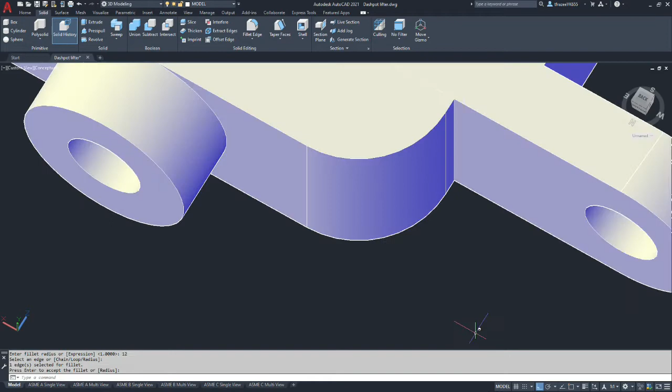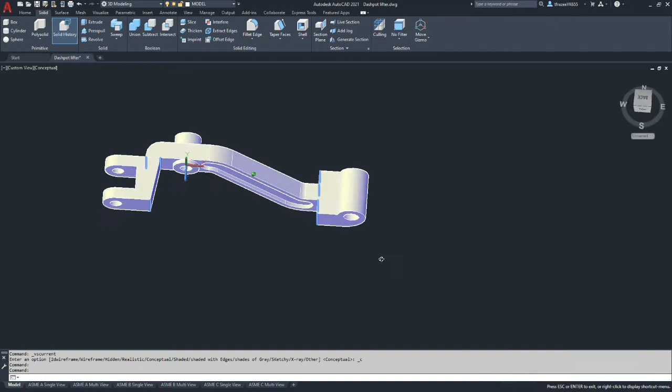Okay, so we got those pockets done. Only thing we have left is fillets and cutting the clevis slot in this side of the part, which I initially forgot to do. So here, let's do it. Okay, we need to be in the top view, and we're actually going to draw on the bottom of the part.

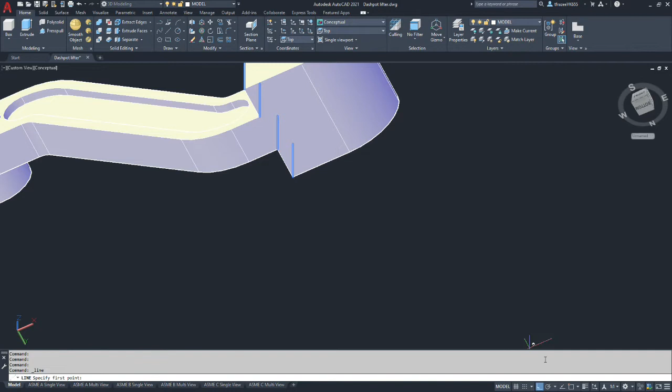So our slot, if we start on the front and draw a line with ortho on out to the extents there, so it's off the part, we can then offset that line 9 millimeters. And then we offset again another 20. And that gives us our width of our cut. And then it's 12 millimeters from this edge back here.

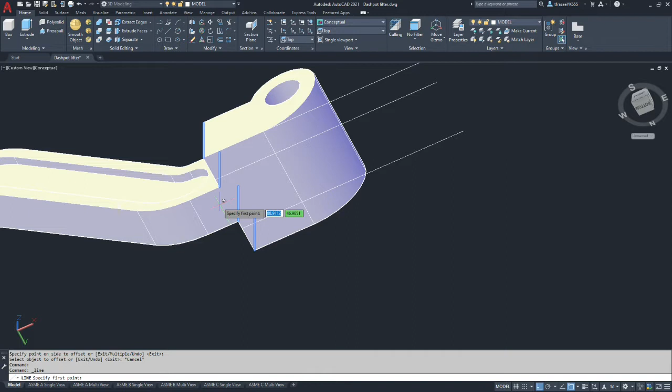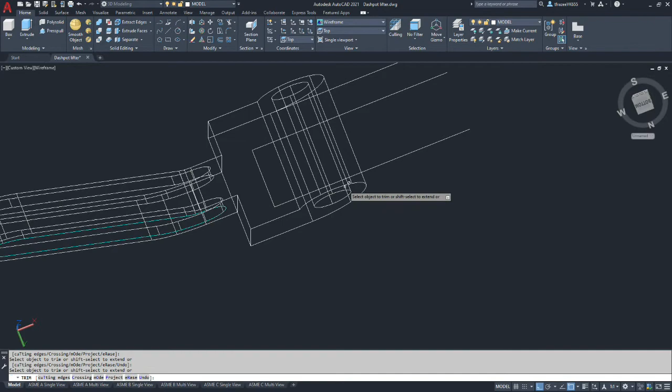So we'll go from end of line to end of line. Let's go to wireframe. Okay, I'm going to offset 12 millimeters from here to the inward, and we're going to trim off these ends. Alright, now the other side of our cut is somewhat arbitrary, it doesn't really matter. We can just connect the ends out here as long as it's longer than the part.

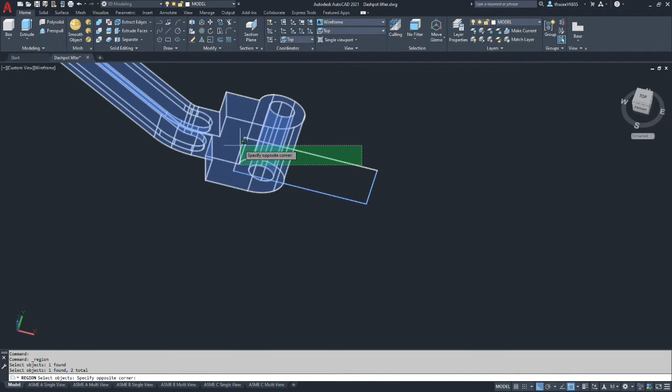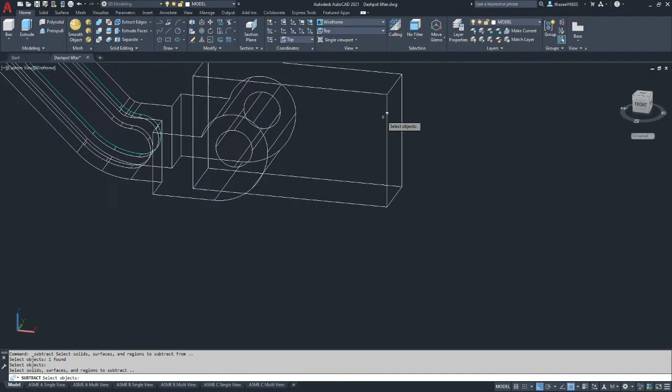Okay. We're going to make a region out of that box we just made. And then we're going to do an extrude with that region. And once we select it, we're going to come up. And let's go 40. And then we're going to do a subtract. So we're going to select the model, hit enter. We're going to select the shape that we're going to subtract, and there we go. So we have our other clevis slot.

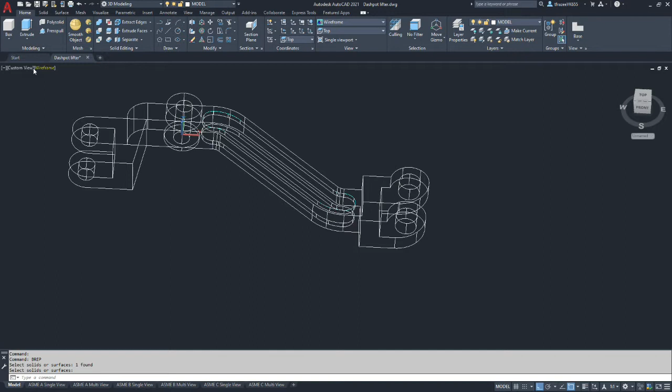Alright, so I already did one fillet. Now we're going to go through and do a bunch of other fillets. And we're going to use this command called brep. And we're going to select on the model. And that should turn the solid model history off. Okay, so now let's go to a conceptual view, and we're going to start putting in fillets. Now I may have to switch out of conceptual, but the radius on all of our fillets are R2s.

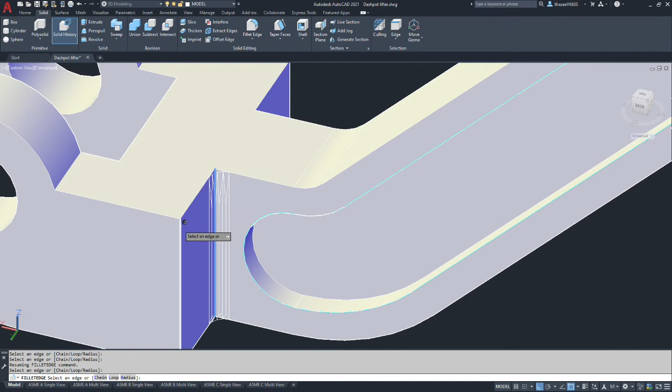I'm going to start with all the ones that you see vertically. So we've got one here, one here. So anything that would be vertical in this angle. There. Here. Here. Those look bigger than R2s to me. Okay, so we got all those so that we can do continuous loops on our other edges. Let's type radius, yeah, that's R2. Okay, so all of those pretty straightforward. They occur where they're supposed to.

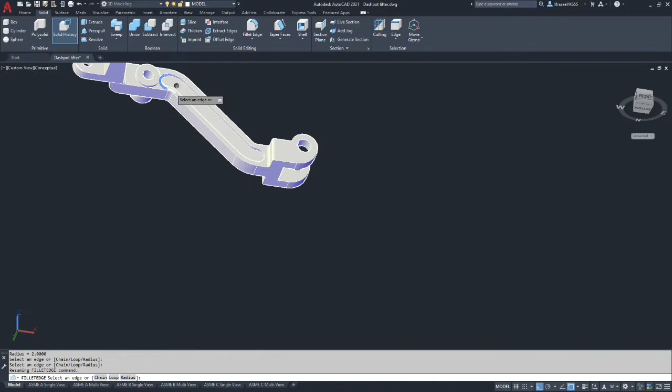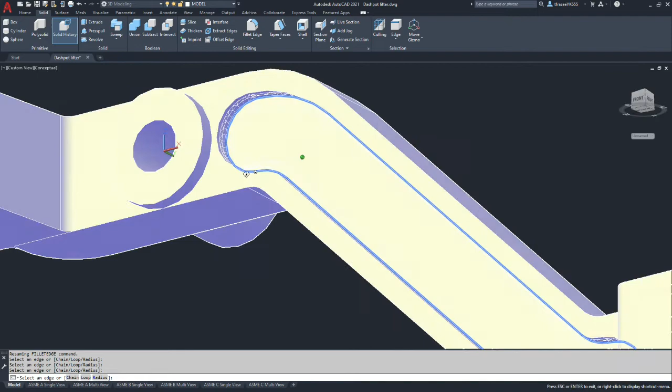Let's start with our pocket. And then we have the top rim of that pocket.

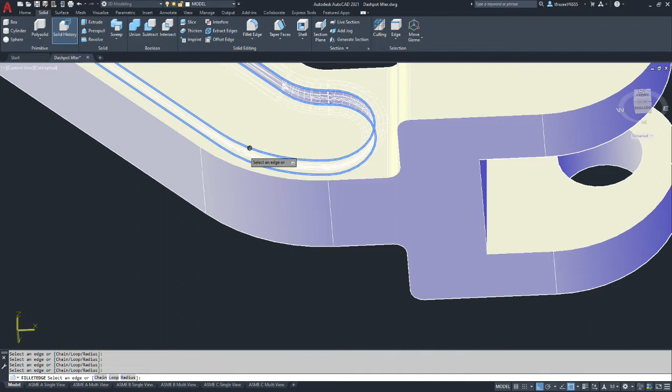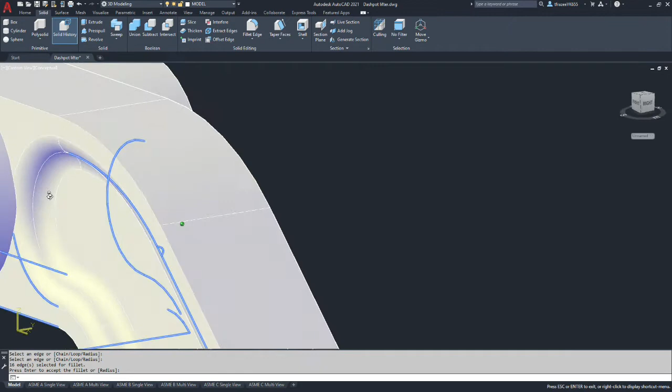Let's hit enter on that. Okay, so that has an S-curve to it and it appears to function properly. Not sure about the transition there with the boss. Let's go do the opposite side. Now start with the floor, just like I did on the other one.

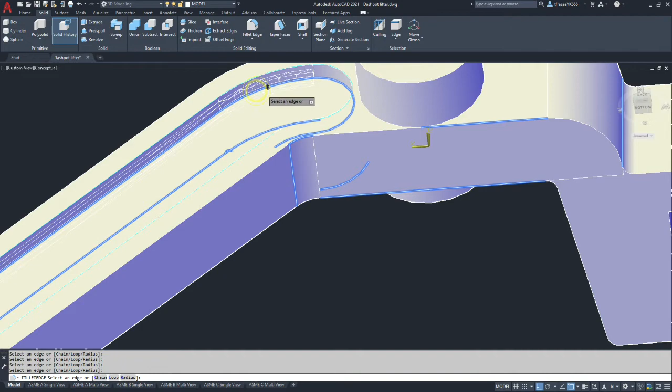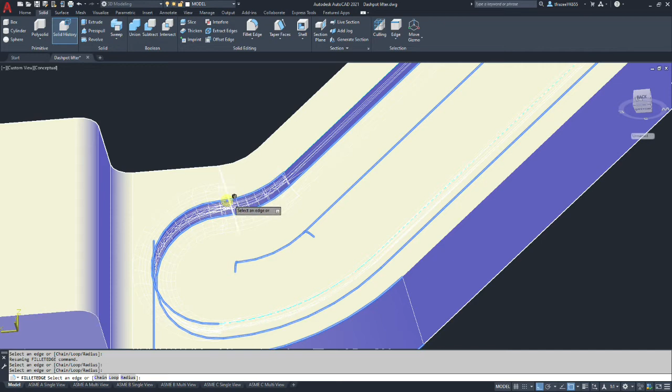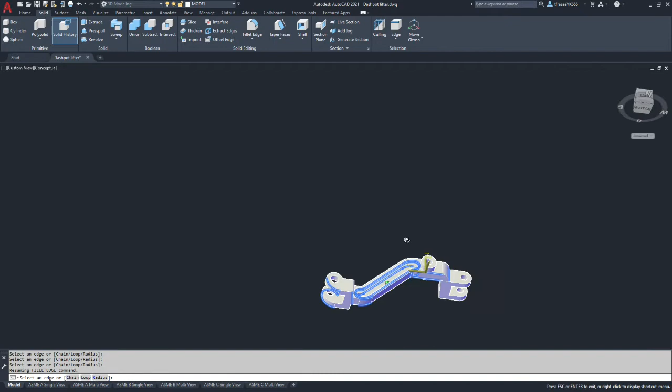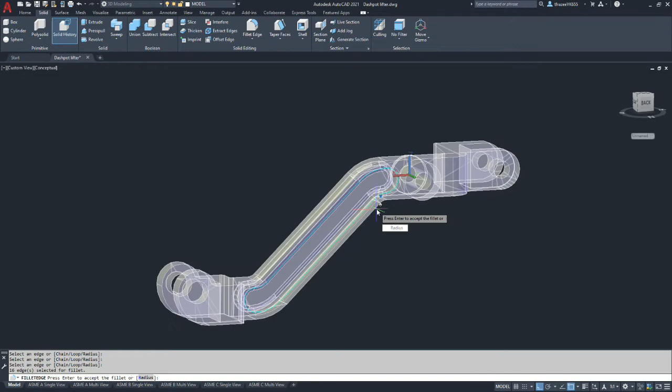And now let's go around the outside rim. There we go. Alright, so the pockets are filleted.

Now we're going to try going around all one edge and see if we can get that to fillet. Now there's a dilemma, we could do the boss first or do around the outside edge first. The fillets around the boss to me are not that important for describing the part. So I'm going to opt to do those second. I might rewind the video and do it differently next time. So we're going to start with going around the rim.

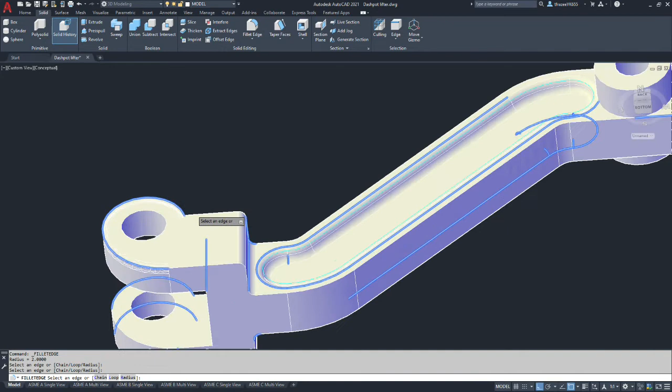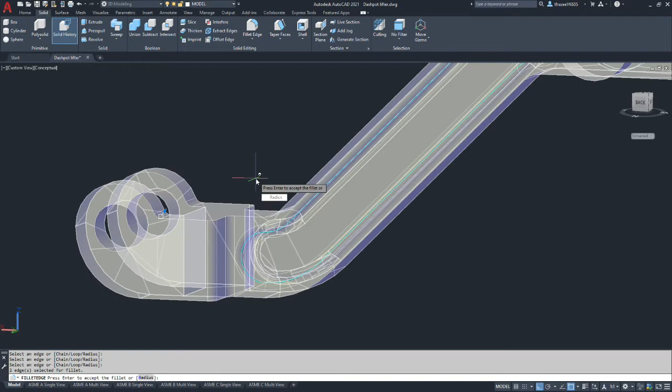Oh, looks like I missed one here. Let's put that in first. Hang on. I should have included that fillet in the first set. Alright, now let's fillet around the edges. And we just keep tracing until we come back to where we started.

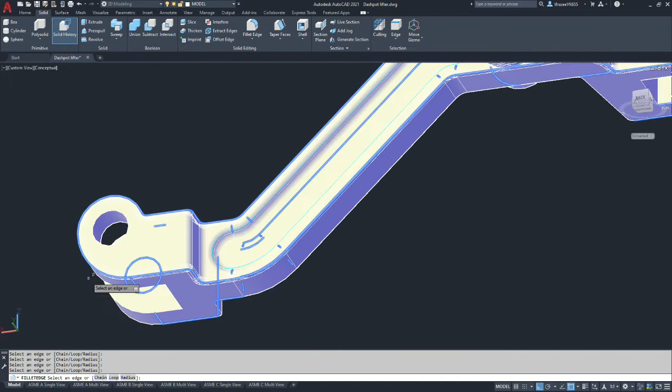Alright, so that's one continuous chain. And it worked. Sorry about the graphics problem. A little blue line shouldn't be there that I've got showing up.

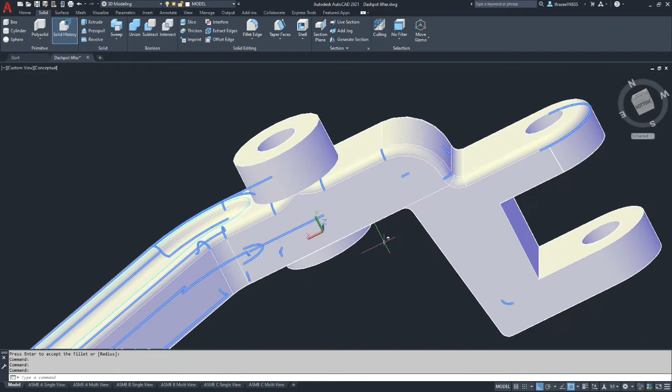Alright, so let's flip to the other side and see if we can duplicate that level of success. So we're back to the front of the part. Fillet. I'll pick that edge. Go around the top.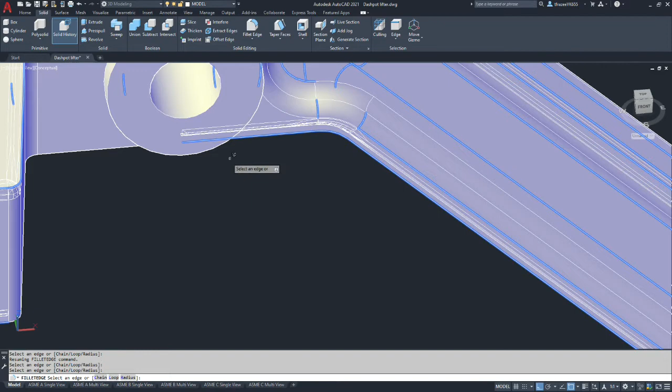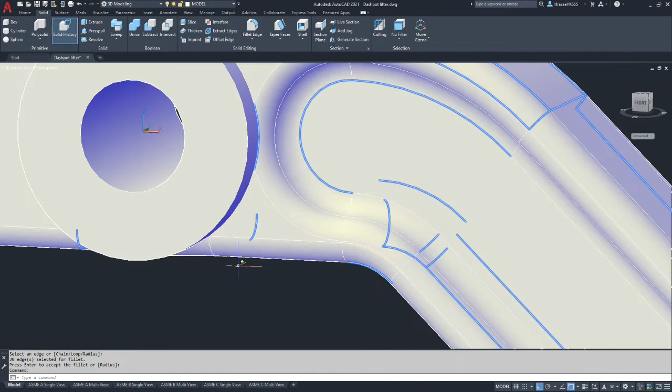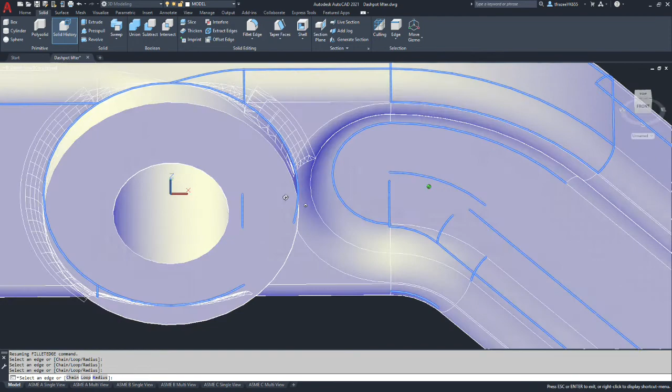Alright, so we have all the fillets except for around the two bosses. So let's see if I can get those to succeed. And maybe they should have been included. I don't know. We shall see. Okay, it looks like those formed. And our last side.

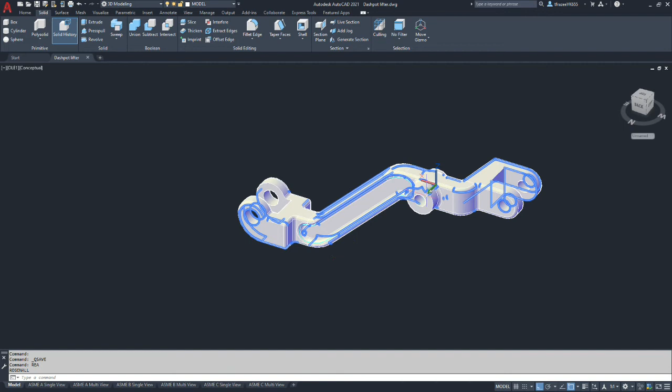All right. Okay, I'm going to exit real quick so you can see it without all these blue lines on it, but I'll be back in just a sec. Okay, there we go. So we have the model pretty much done. We're going to be doing the different views set up for the drawing.

Okay, so what this project ends up going to be is a broken out and a broken out revolve view. Create a top and a front flat shot. And we're going to modify those flat shots, and then we're going to go create the different views we need on C-size sheet. And you need to have this fully dimensioned.

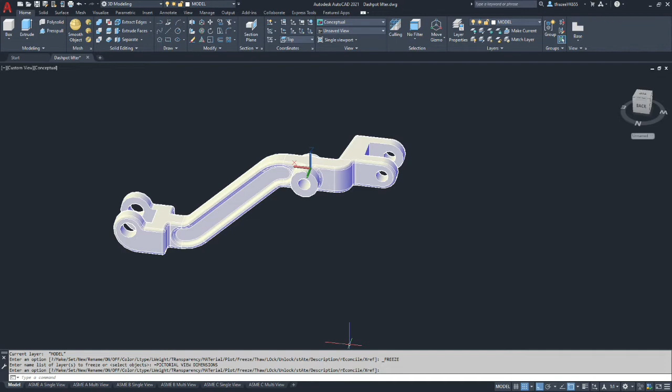Okay, so first thing I'm going to do is I'm going to go home and I'm going to make my construction layer frozen and our pictorial view frozen. Okay, so any of the little lines and stuff should be gone from this view. Okay, so I'm actually looking at the back of the part here.

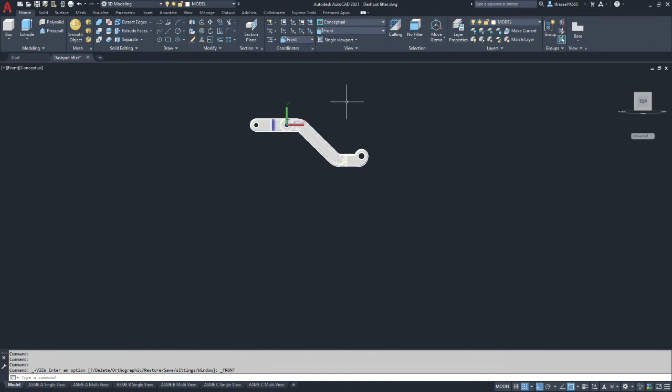All right, so we're going to go to our procedure, step 6 in our procedure. So we're going to set to world coordinate system, but our view is going to be on the front plane. Okay, and we're going to type flatshot. We're going to insert a new block. We're going to do it by layer. Continuous. Under obscured lines, it's got to be by layer. It's going to be hidden. And then we're going to hit create.

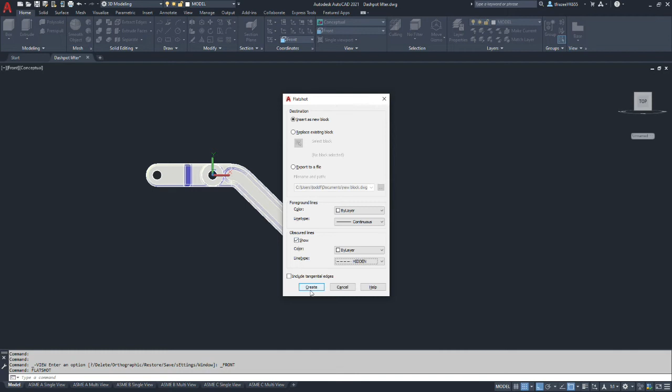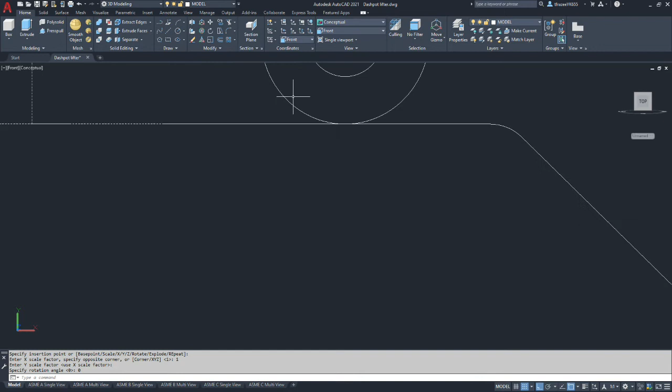Okay, so we'll take that view. We're going to zoom out pretty far. And we're going to place that view above at a scale factor 1, 1, and 0 for rotation. Okay, zoom in. And we should probably go to wireframe here. And it looks like we got what we need. We got a hidden line there, got a hidden line there. And I'm not seeing our pocket. And that is because tangential edges are off.

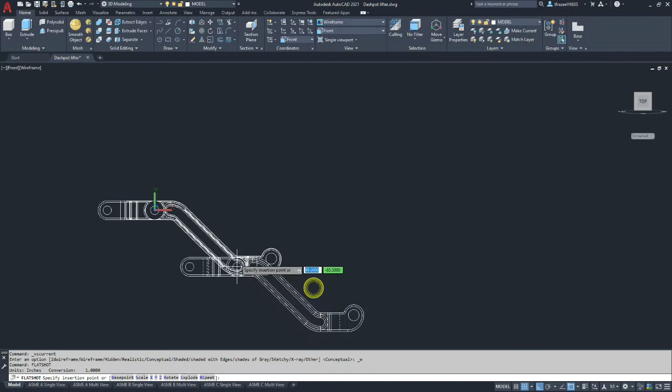Alright, so let's do that again with tangential edges on, but I think it's going to get pretty hairy. And we're going to check this box here. It says include tangential edges, and create. Now let's place it above the other view and see what it looks like.

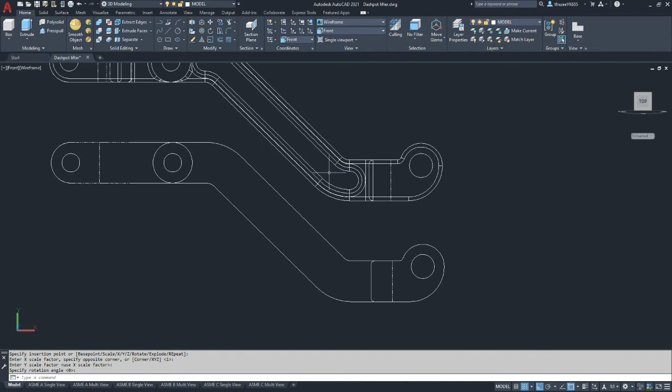Well, it doesn't look too bad. It's pretty busy. It's got a lot more hidden lines on it. But the main thing is we got this pocket showing up. We need the pocket there. Alright, so let's get rid of the first one we made and we'll use the one with tangential edges.

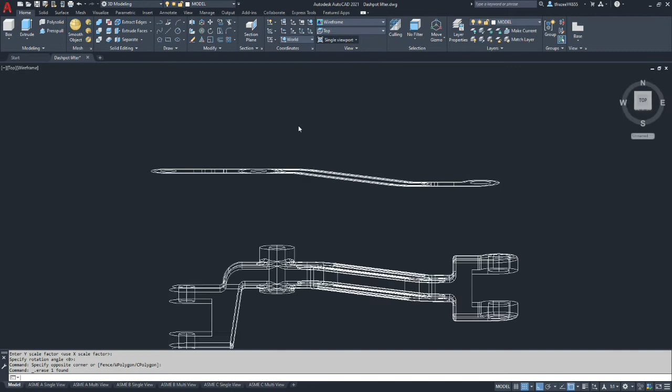Okay, now we need to do a top view. So we're going to go to world coordinate system and top view. We're going to type flat shot. And we're going to keep all the default settings. If we use tangential edges in one view, we probably should have it on the others. Let's do it with that, see what happens.

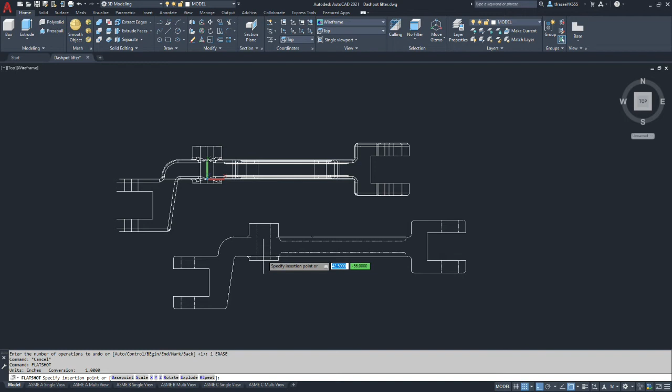And to me, that's a view that's a lot easier to comprehend. So I think I'm going to leave it, because if we added all the fillets, we wouldn't be able to see the hidden lines for the bottom of the pocket. So let's zoom out and let's stick that view up at the top here. And it's going to be 1, 1, 0. And we've got our top view.

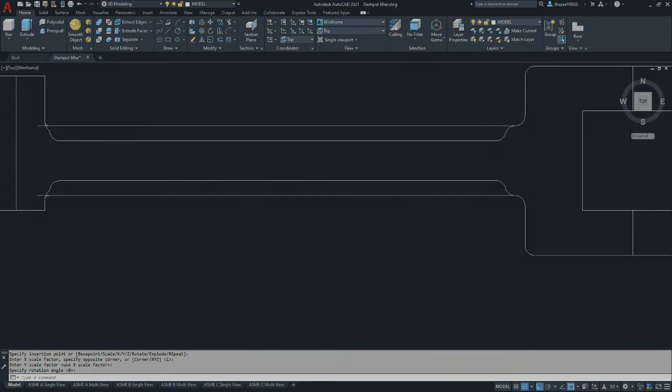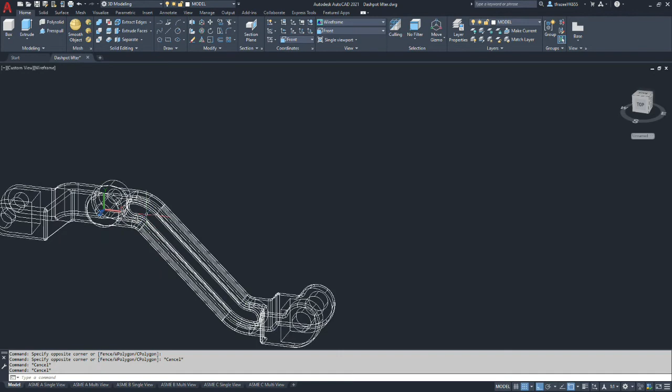Okay, we've got our flat shots of our standard orthographic views. And now we're going to create a plane for our revolve section. And it's going to cut through this section. It looks somewhat like an I-beam. And we want it to be parallel to the angle that it's traveling, so it's a true view.

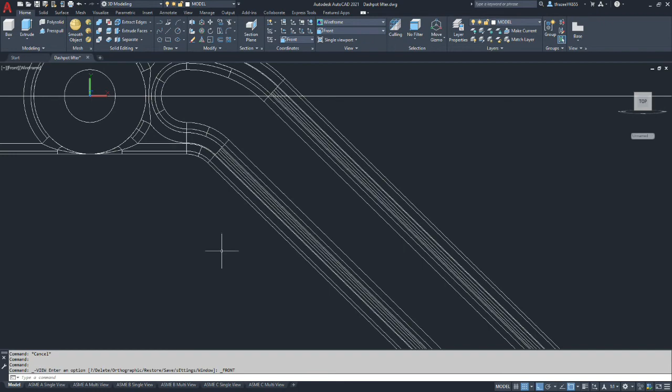So we're going to use these endpoints, which are in the plane, as our selection points. So we want to make sure we're in front UCS and that we're operating in the front view, because that's the view the cutting plane would come in. Okay, so I'm going to rotate the view even though I'm operating in that UCS, and we're going to draw basically the angle, because it's not one of the standard orthographic views.

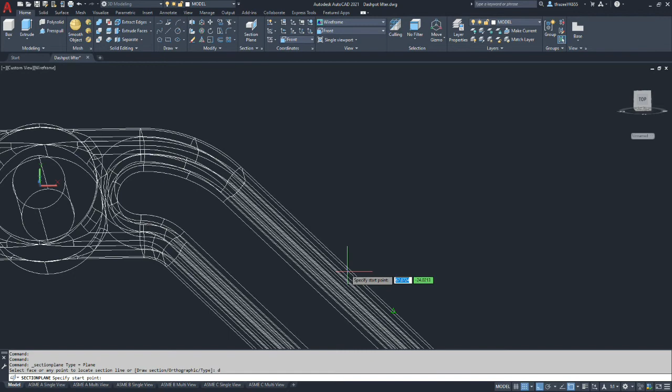So we're going to go to section plane, and we're going to use D, which is the draw section. It allows us to do it by drawing it, and we're going to draw a couple points to define the plane. So first we're going to pick the very top endpoint, and actually let's make sure we turn ortho and grid off, and the only object snap we want active right now is endpoints.

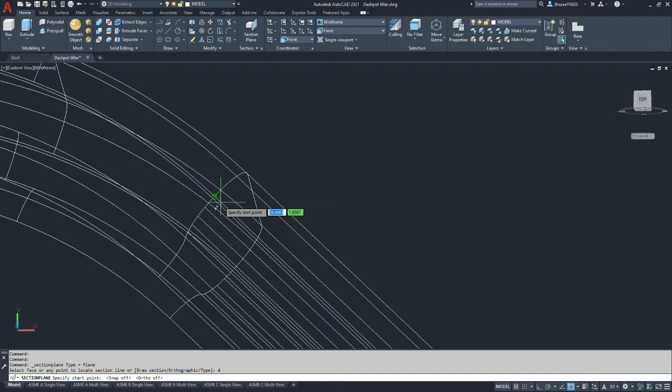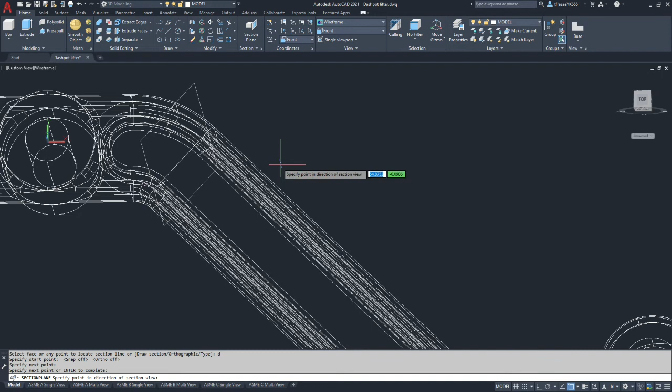Okay, so we're going to pick the tangency point of the top of the outside radius, and you're going to start seeing a plane being dragged, and we're going to go over and select the opposite one, and we're going to then hit enter. Okay, so you now have a plane that is sectioning the model, and the boundaries of it really aren't that critical.

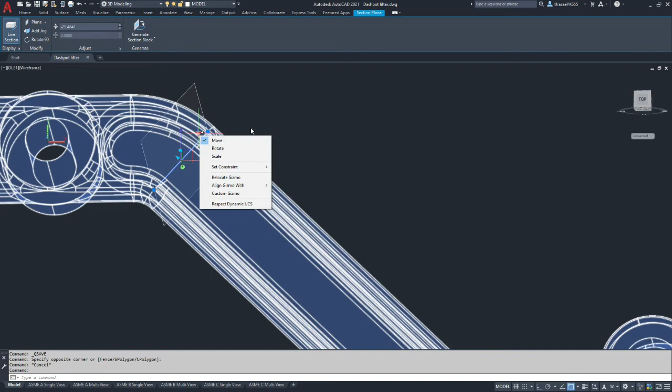Okay, now you're going to left click on the plane itself until you see these handles show up, and you're looking for the one that looks like an arrow pointing down with a line on it. We're going to right click on it. You might have to rotate this to get it to the right angle. Okay, you might have to zoom in and maybe turn your object snaps off because it can select things you don't want.

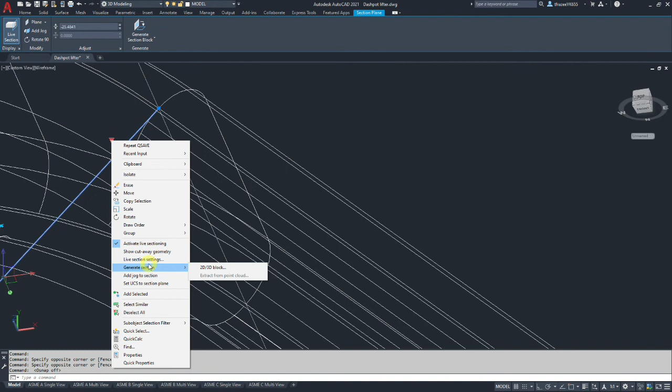We're going to right click on it. You should have this long menu show up, and you're going to select Generate Section, 2D/3D Block. If you don't see all these parameters, make sure that you have it expanded, this arrow here, and we're going to go to Settings. We're going to set a bunch of settings.

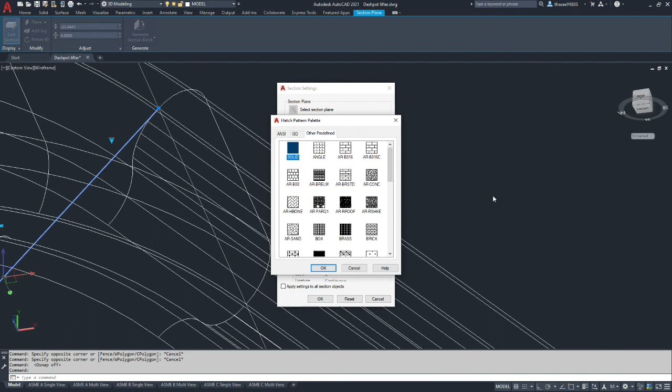Okay, so we're going to start with our intersection boundary; the layer is going to be profile and visible lines. On intersection fill, yes, we want it, but we want to select the pattern. So we're going to go to select hatch, we're going to select pattern, we're going to go to ANSI, and we're going to select number 31 for cast iron. We're going to hit OK, and then we're going to change the hatch scale. Now, since this is a metric drawing, it's going to be 25.4.

And the color is going to be by layer. And we want it to be on the layer for dimensioning. On background lines, we know we don't want to show background lines. And hidden lines, we don't want to show either. We're not showing the background of the part. It's going to be a simplified section.

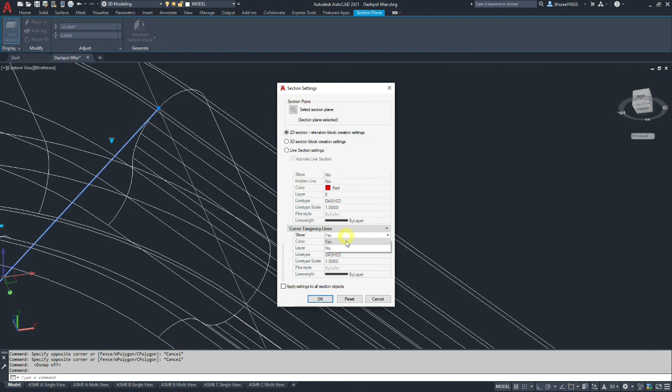The layer is going to be profile and visible lines. Cutaway geometry, we don't want to show, and we do not want hidden lines. On curve tangency lines, it says show, we want to toggle that to no. Okay, we're going to hit OK, and we're going to select create.

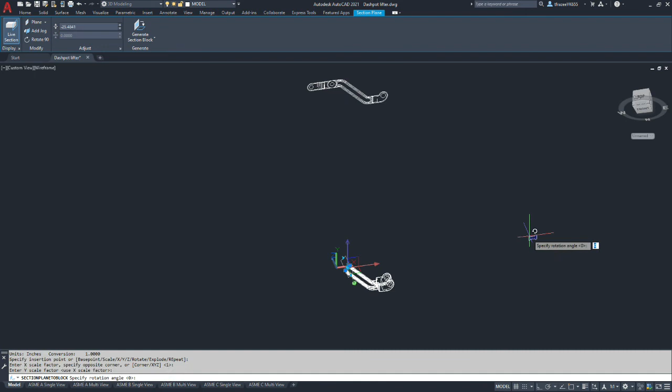I'm going to zoom out a little bit. And we're going to pick a point where we're going to place it out here in space. And then we're going to hit enter to accept 1, same scale factor, and 0 rotation. So we should have a section that looks like an I-beam with a crosshatch here.